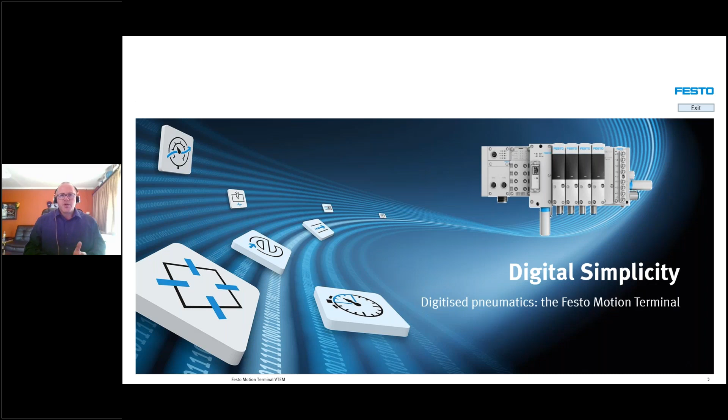So where to from here? First, the Motion Terminal, which we refer to as VTEM, is opening up radical new dimensions in the world of automation, as it's the first valve in the world to be controlled by apps. So it's the first product to truly earn the label of digital pneumatics for a wide range of functions that currently require over 50 components. So once again, digital simplicity.

What does that really mean? Digital simplicity means maximum flexibility combined with maximum standardization with minimum installation. So for the first time ever, the function of a valve can be changed by an app. What does that mean? It means new intelligent technology consisting of pneumatics, electronics, software, and hardware is there to realize directional control valve functions right through to complex motion tasks.

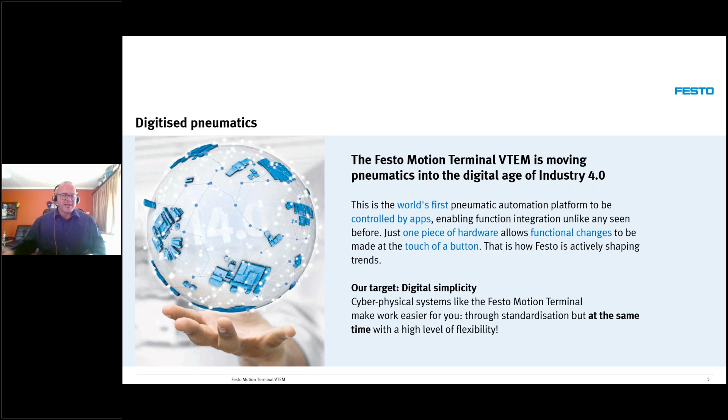It also allows us to realize functions such as status monitoring, reduced energy consumption with far fewer parts than before. In addition, some motion apps can automatically adjust to changes in parameters. We know in standard pneumatics, if you have changes in atmospheric pressure, temperature, or compressor load, your pneumatics react differently. That's why we say the VTEM is a true Industry 4.0 leader in digital pneumatics. We mentioned combining mechanics, electronics, and software, and this is all brought on by the requirement of Industry 4.0.

So Industry 4.0 represents another fundamental change in the world of production, where the real world and the virtual worlds are growing ever closer, driven by the internet. So modern information and communication technologies are being fused with traditional industrial processes in what we call cyber-physical systems, thereby changing the value creation chain in many production areas.

This global change, and yes, it's a global change, not just in South Africa, is taking place on all levels of the factory of the future. So digitalization will profoundly alter the world of production. A standard solution that combines mechanics, electronics, and software can become a cyber-physical system, with conventional objects turning into subsystems that have the ability to not only receive data, but communicate data.

So all of that being said, where's the benefit for you as the customer realizing Industry 4.0? And of course, that's realizing the value-added benefits. So with the onset of Industry 4.0 or digital pneumatics, we can now include things like analytics, condition monitoring, and of course, all of this brought to you by cloud-based services. So by the likes of a dashboard, you'll be able to see the health of your machine. And this introduces what pneumatics couldn't really do in the past: preventative maintenance.

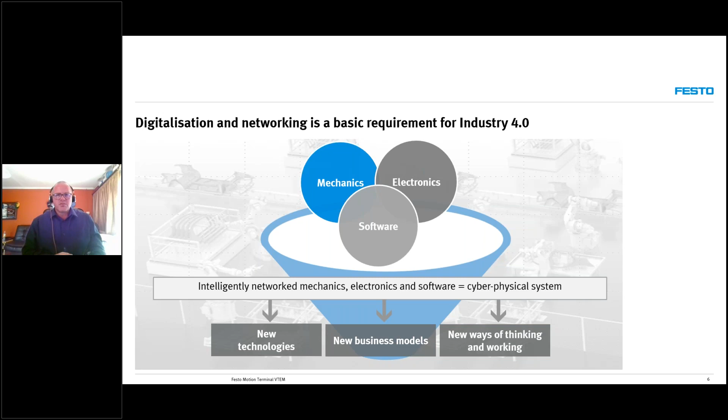So this I refer to as a typical disruptive technology. So you might ask, what is disruptive technology? Disruptive technology is innovation that radically changes the way consumers act, produce, or consume in the industry of today. So we all used to go to work with a GPS, perhaps carrying a notebook, maybe the video camera over the shoulder, your laptop under the arm, the old phone. And that is where we really see disruptive technology took over and changed the way consumers go about their daily lives.

So if you leave your life at home, which we refer to as the phone, you've lost all of those components. So that's a typical application of disruptive technology. If you look 20 years ago, I can remember my fiance at one stage saying, I've got a laptop and I've got a phone, why would I want this thing called a smartphone? That's back when BlackBerry was just coming in. So imagine where she is today, a Samsung freak, where everything is now in one form of technology.

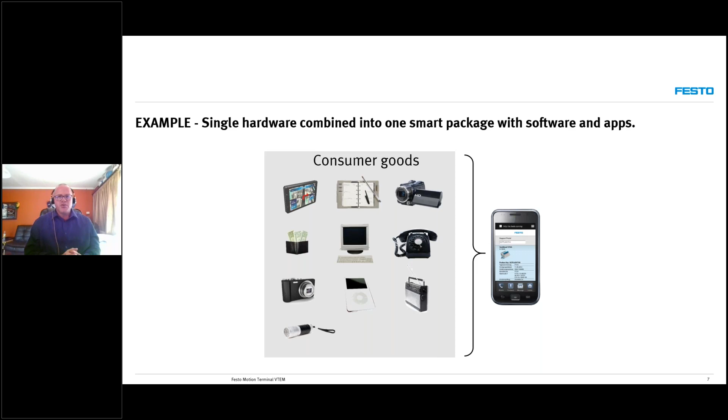So you might ask, how do I draw this conclusion into industrial process automation? Well, it's quite simple. We have a look at the valve terminal. I'm going to put on my laser pointer. So if we have a look at the valve on the right hand side, we start to see that one singular valve can replace up to 50 components. And those 50 components could be perhaps shock absorbers, proportional pressure regulators, getting rid of those nasty little flow controls that people love to adjust all hours of the night. So all of those are now being combined into a single valve.

So once again, what is the benefit for you as a customer? It's reduced components that you need to keep in stock. It's flexibility that you've never had before. That valve has the ability to camouflage itself or change its characteristics by selecting an app. My colleague Brett's going to show you a little bit later how you exactly change between apps. But imagine having one valve that can cover all of that, whether you've got a 5/2 way, a 5/3 center closed, 5/3 center open, or a 3/2, all of those in one.

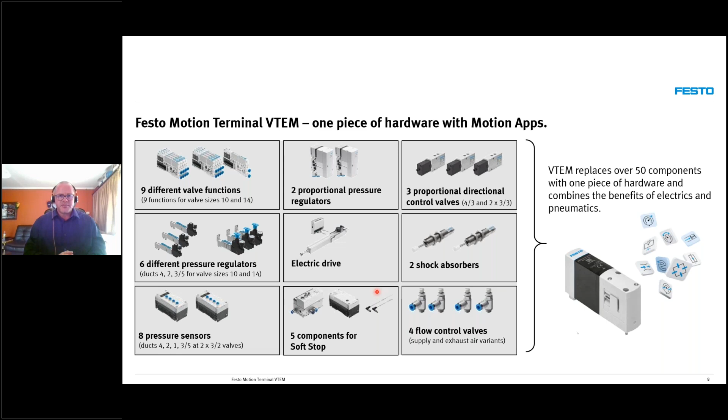Over and above that, you can now include other things like proportional pressure, proportional flow, all of it through one valve. So let that sink in. One valve that will replace pretty much any valve that you've got in your factory. Sounds too good to be true. Well, let's have a look at how it actually does work. So on the left-hand side, I've got the motion terminal, one cylinder, one valve, and of course an app. Now the app, as Brett will show you, you can select either via PLC or bus to change the characteristic or the method that the valve is actually operating.

So let's compare that to standard pneumatics. On the right-hand side, still the same pneumatic cylinder. We have flow controls, pressure control, because we want to be able to do some form of energy saving or energy monitoring. So we'll have pressure regulators and a standard 5/3 valve. For those of you like me that have forgotten what these hieroglyphics or symbols look like, let's relate it to your machines out there. So let's start by introducing the valve that you might see on the machine: a standard 5/3 bistable valve. So what do we do on machines nowadays?

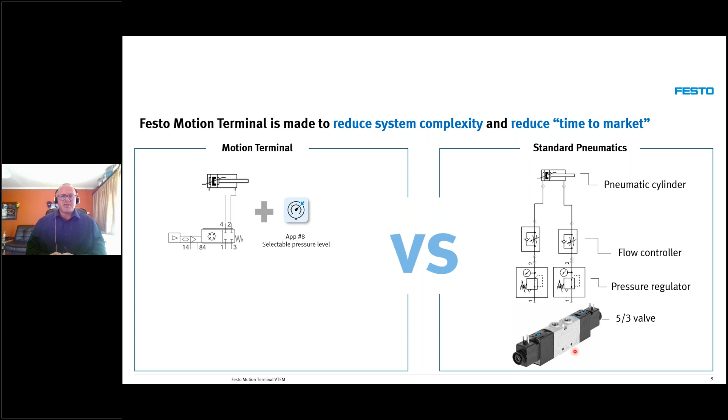We need to control the speed of the cylinder, so we'll include flow controls. Remember, on these at the top, you'll have a little knob. You turn the knob, and of course, you're controlling the exhaust pressure from the cylinder. That will in turn slow down the cylinder, and with that, reduce banging, the mechanical wear and tear on a cylinder. So flow or pressure control: we add in two pressure controllers, and now we can control the pressure going forward and the pressure going back.

You might ask me why? Because let's have a look at an application where we want to move a box. Let's say in a food and bev industry where you're moving a whole bunch of products into a box and then bring an empty plate back. You don't need the same pressure moving backwards as you do moving forward. So believe it or not, you can save up to about 70% of your energy consumption by being able to vary your pressures for your in-stroke and your out-stroke.

But having two pressure controllers that are manually adjusted and locked is not really a digital way, or an optimized way, of controlling a system. So let's have a look at changing those to an electrical control philosophy. Of course, with proportional pressure regulators, we can control those via analog, so perhaps 0 to 10 or 4 to 20, or even IO-Link. So now we can digitally, by means of a recipe, change the pressure.

And if you include new electric flow controllers, you can now, by means of recipe, change all of those parameters to suit the machine. But have a look at that. That's 5 components that you need to look at: a valve, 2 pressure regulators, 2 flow controls, just to supply one valve. So let's compare what the VTEM actually can do. You've got one component instead of 5. You've got one BOM, one bill of material that you need to size up or order.

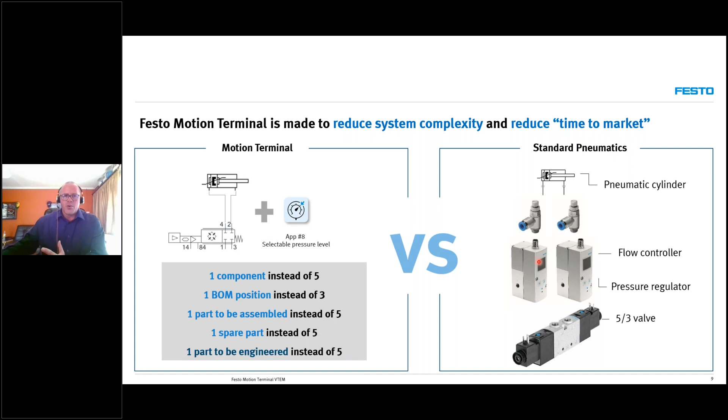You've got one part that needs to be assembled, that needs to be maintained, that needs to be fault found on. So you've got one spare part instead of 5. Look at what benefit that's got for your storeroom. Now your storeman only has to have one spare part instead of 5 different spare parts or 3 different categories. So that's where the VTEM really plays its part. Hopefully you can see that we've managed to reduce the parts. We've given you flexibility, and all of this in one simple valve terminal. When I say simple, remember digital simplicity.

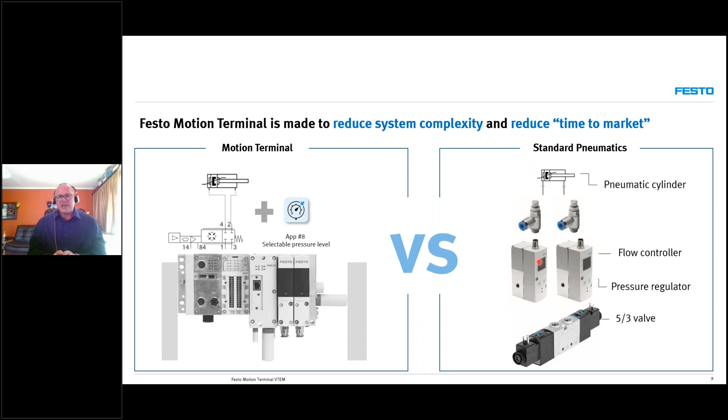So let's compare electric automation with standard pneumatics. As you might know already, Festo has a full range of standard pneumatics, a full range of premium electric automation products, and of course, we're including VTEM as the bridge between our customers in two worlds, where some of them are so engrossed in the electric automation side that they've converted the majority of their machines to high-speed servos, looking at greater precision, perhaps complex movements or variable positioning profiles. So that's all the benefits you get from a traditional servo system.

Comparing it to standard pneumatics, it's a bit easier to operate. Perhaps the overload protection is of interest to you, or maybe because it's been in the industry for so many years, you deem it to be reliable and of course sturdy. So on the two hands we've got our pneumatic customers and our electric customers, and now we put the VTEM in the middle, where of course we now get digitized pneumatics. The VTEM is now giving us the option of creating complex movements without the need for servo pneumatics.

For those of you that ever had the, I call it misfortune, of having to set up a servo pneumatic system, you need high levels of expertise and programming background to be able to set it up. And even though it was revolutionary in its time, it has seen better days. So looking at the VTEM offering things like higher functionality and condition monitoring, do you see where the gap between standard pneumatics and standard servo technology is now closed and bridged by digital pneumatics?

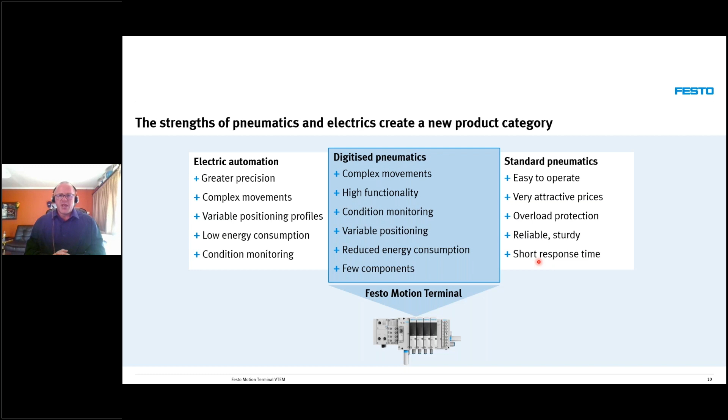One of the key elements, of course, is the reduced energy consumption, but I think one of the biggest parts that stands out is the fewer components. One of the applications that we'll take you through at the end of the webinar shows you how we can reduce big complex panels with proportional pressure regulators into one valve terminal. But I don't want to give too much of that away, because I believe you'll be amazed at what it can do. So how does the VTEM actually work internally?

So without going into too much technical detail, each valve slice has 4 piezo valves internally. So with that, you'll be able to see that on your 2 working ports, output port 2 and output port 4, we have 2 piezo control valves. By adding in flow sensors and pressure sensors internal into the valve, we can control both pressure and flow to both ports simultaneously.

So let's imagine a system where in the old days you wanted to lock a pneumatic cylinder mid-stroke with a 5-3 valve, and you would pressurize both sides of the port. Taking into consideration perhaps the wear of a seal on the cylinder, you'd always get creep to one side or the other. So with the onset of VTEM, or with the support of the flow controllers, we can actually monitor if there's movement in that cylinder and compensate by changing the characteristics of the valve to force the cylinder back or to lock it in position.

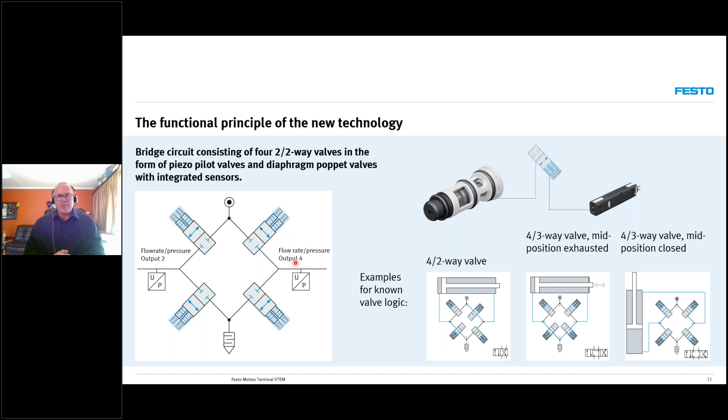So that is in essence what the VTEM does internally. So it's combined your flow controls, your pressure control, the valve function, all of it in one platform. So where does this fit into your machine? Do you need just the VTEM? Do you need high-level PLC?

Well, staying with Festo's ability to integrate into third-party networks and PLCs, the VTEM also seamlessly integrates into many field buses and of course the PLCs out there. So if it's Siemens, Allen Bradley, or perhaps Omron, we take care of the EtherCAT technology, Ethernet IP, Profibus, and Profinet. So you might ask, do you then require an additional PLC on the machine?

So for smaller machines or standalone machines, you do have the option of including an onboard PLC based on the Codesys platform, and you can of course include it into the valve terminal and have additional IO, etc. So really flexible solutions depending on what applications.

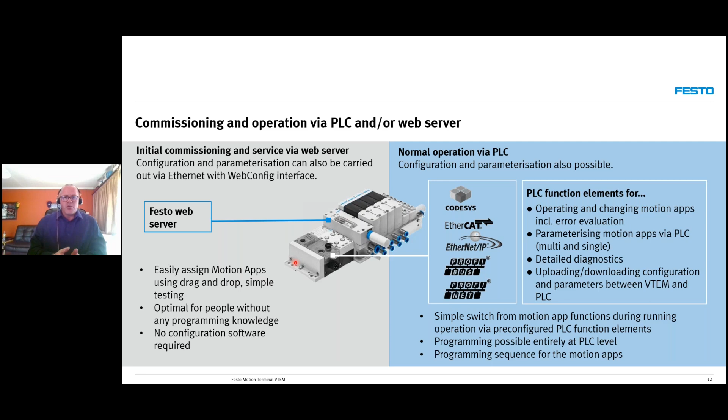So one of the things that has always been asked is, is the VTEM designed for your rocket science type applications? And it's not. If we look at the majority of the applications, you'll be quite surprised in the basic applications that you can do, reducing complexity, reducing installation requirements, all from one single valve terminal.

So if we look at the layout or the topology of what the VTEM actually looks like, on the left-hand side, you'll see where the CPX bus node module sits. So of course, there you can add your communication module, or depending on the amount of IO you need to control on the machine, you can have a Codesys controller inserted there. On the CPX module, you can add in additional IO for the process logic, but on the right-hand side of the valve terminal itself is where the integrated IO is for the VTEM technology.

So because of the speed that the VTEM needs to change parameters and adjust itself, the IO is directly connected into the VTEM module itself, and therefore we've reduced bus delays, scan delays, all of that to ensure the fastest and most economical adjustments from your valve terminal.

So as you'll see at that point in time, we've got a sample of the 4 slice. So even though this is only 4 valves, each valve can be either 2 proportional pressure regulators, it can be 2 3-way valves, it can be 5-3, it can be a lot. So one of the applications, you'll see how we can reduce your installation. So standard configurations, we have an 8-valve slice, the 4-valve slice, and the latest to be introduced is the 2-valve slice.

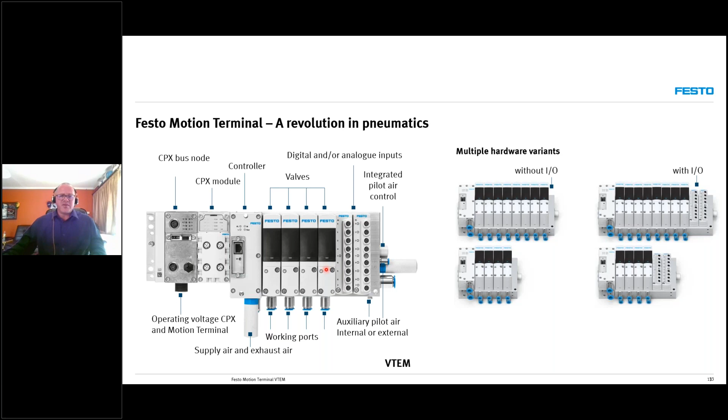So one of the other questions that I've always gotten is, do you have to have only VTEM valves if you've got basic applications like a flap where you just want to have it open and closed and you don't really care if it's controlled, you just want a basic valve? So with this, you can of course integrate standard valves into the platform. It doesn't have to all be that.

So earlier I mentioned that the VTEM is controlled by apps. So how does that work?

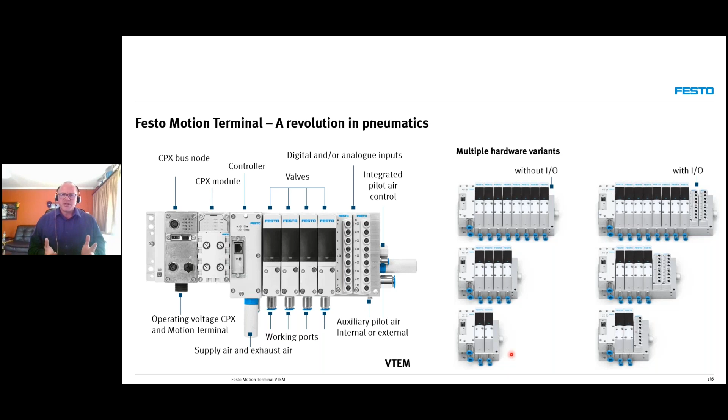So if we look at our licensing department, and I say licensing department with a bit of tongue in cheek because it's not like the South African licensing department that never works. This one actually does.

So the way it works is you've got access to your online shop. You then add in the Festo App World as a selection, then you purchase a license or an app. So with the valve terminal, there are several apps that come standard, and Brett is going to touch base on how these apps actually work or change between the valves. But what I'd like to bring across today is once you buy the app for the valve, whether it's a motion app or a pressure app, it stays on your actual valve terminal.

So let's say in about 10 years time, you need to replace the complete unit for whatever reason. Let's say a forklift driver misjudged and he crashes into it. Your license can be uploaded, stored in our licensing department or our license central, and be downloaded to your new valve terminal. So it doesn't mean you have to reinvest in those licenses.

So for each valve terminal, you will buy a license or an app, and that will of course be able to control. So a lot of the guys were concerned that they couldn't just take off the license, for instance, like old Windows, they can now put it onto a newer VTEM.

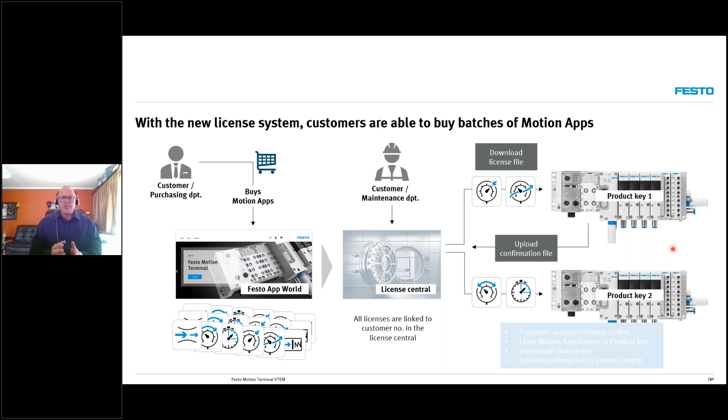So earlier I mentioned that it's not just for rocket science applications, it's for basic applications where you need better control, perhaps reduced complexity, or just better feedback from your standard pneumatics. So if we look at applications out there today, we look at pressure control, perhaps motion control, a combination of them all, or just standard flow.

So in our applications today, we're going to have a look at proportional pressure control, where the valve terminal can actually go from vacuum directly into pressure. We can do blow functioning, we can do air knives, but we'll be looking at a curing press in the tire industry today, as well as synchronized movements. So all of these from pneumatics, which traditionally was, let me say, difficult to achieve.

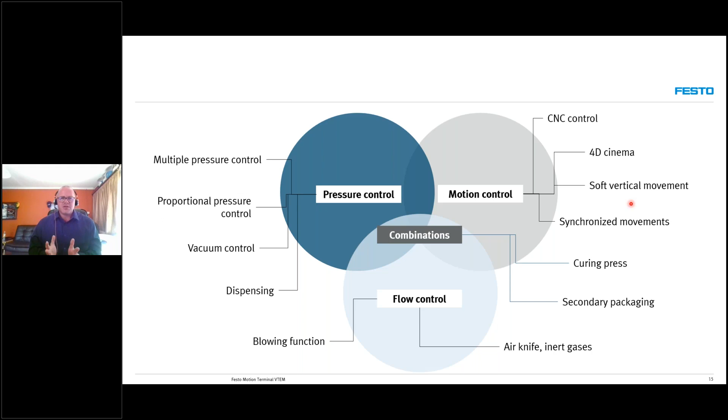So with that, I think I've said enough. So before we go into the application examples, I'm going to introduce you to my colleague Brett. He was, how can I say, kind enough to do us a demonstration. So the demonstration is a recording purely to ensure that we have no buffering issues. So I'm going to start that and of course hand over to Brett for after that. So waiting for video. There we go.

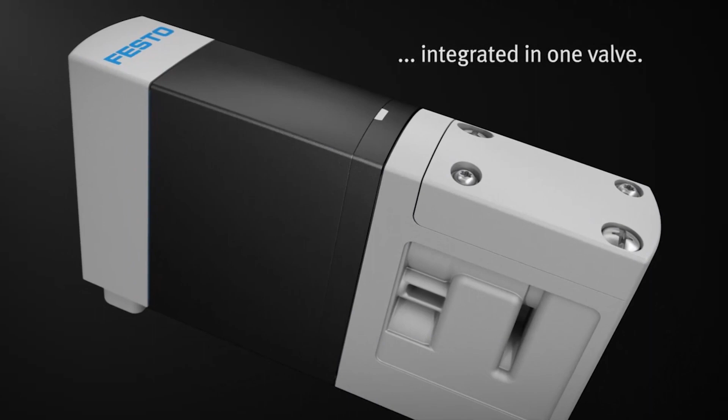Good day. My name is Brett Benakada, and today I will be taking you through an overview and quick demonstration of our VTEM or Motion Terminal demo case. We have a few of these around the country, so please feel free to contact your nearest sales engineer or application engineer for a face-to-face demonstration. So let's get the VTEM demo case set up and we're ready to go.

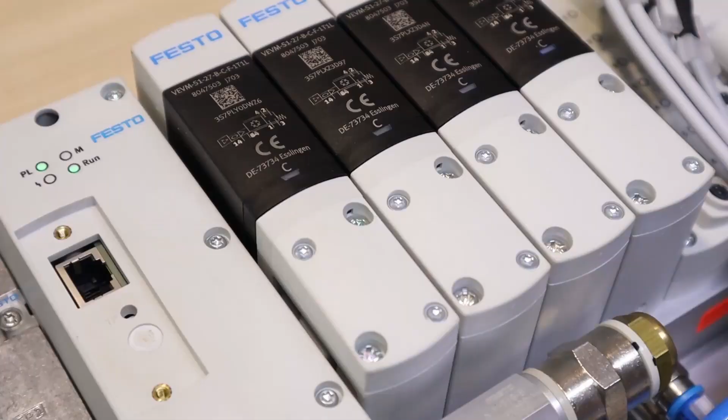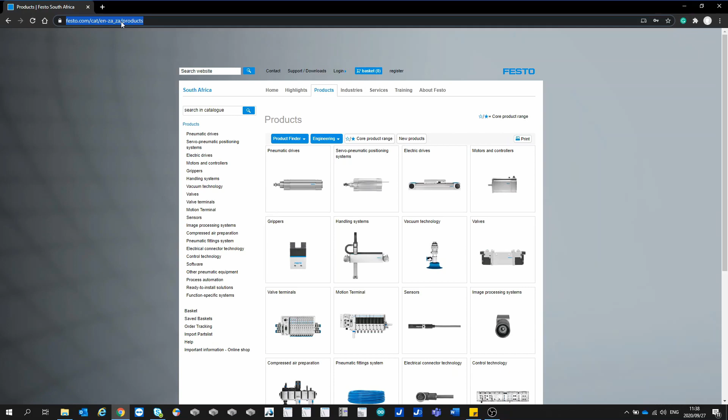To configure the VTEM, you don't need any special software. It has a simple web interface which you can access using your computer's browser through an Ethernet cable. So we will type in the VTEM IP address in the browser. And here we are presented with the actual configuration as a picture view of our VTEM. So let's click on the configuration tab, click accept. We have to log in to make any configuration changes to the VTEM.

Here we can see these two valves here have apps assigned to them by these little icons over here. This valve is currently not in use or doesn't have an app assigned to it. And this valve here also has an app assigned to it. We can also have a look at the status of the inputs, and we can see the pressures of the exhaust port and the pressure port.

We can also see the available apps that we have on this Motion Terminal. Here are all the apps that are currently available. Here's how many licenses are loaded onto this specific Motion Terminal, and here's how many are actually available for use. Some apps are available across the board, so when you purchase the app, it is available to all the valves simultaneously. Some apps are per valve.

So if you have one app available or one app loaded to the VTEM, that app is only available one at a time. So you can load it to valve number 1 and you can use it there, but while it's used by valve number 1, it cannot be used by valve number 2, 3, or 4. So if you would like that app to be used in more than one valve at the same time, you will need to purchase 2 of those apps.

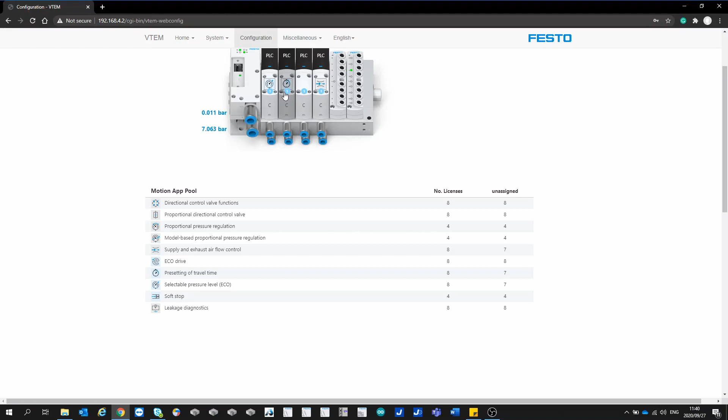Right, so to configure the valve, we click on it, and currently we can see that this valve has got the app assigned selectable pressure level, or the eco app, where you can select the forward pressure and the backward pressure to save air consumption. We are going to unassign this app by taking control. Alright, so this takes control from the higher order PLC. Now we have control of this valve from this web user interface. We're going to unassign this app. Now you can see there's no app assigned.

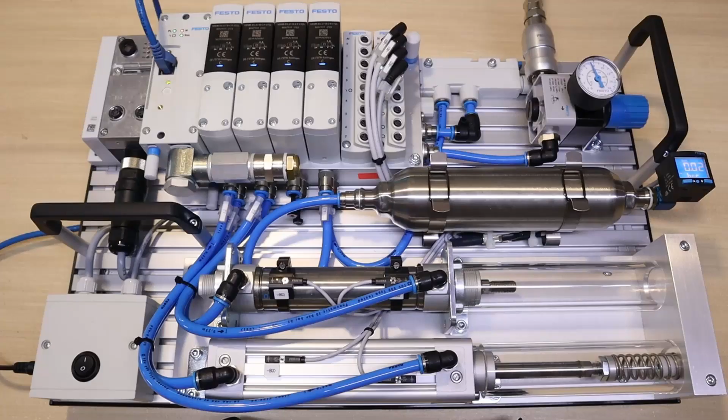So here we can see valve number 1 is connected via these pipes over here, and if we trace them back, they run to this cylinder over here. This cylinder has a spring on it, and the idea of this demo here is to show you how the proportional pressure works. So let's set that up. So let's find the proportional pressure app.

There we go, proportional pressure regulation. We're going to click on that. We're going to assign that app to that valve. Okay. And it asks you for some basic parameters of the application.

Now, the proportional pressure regulation app doesn't require too many parameters other than a rough estimate of the volume that you're controlling. Here you can see it's just a small, medium, large, or customer specific. But basically, anything below 0.1, anything between 0.1 and 1 liter, and anything greater than 1 liter. This cylinder is somewhere between 0.1 and 1, so I have selected the medium volume.

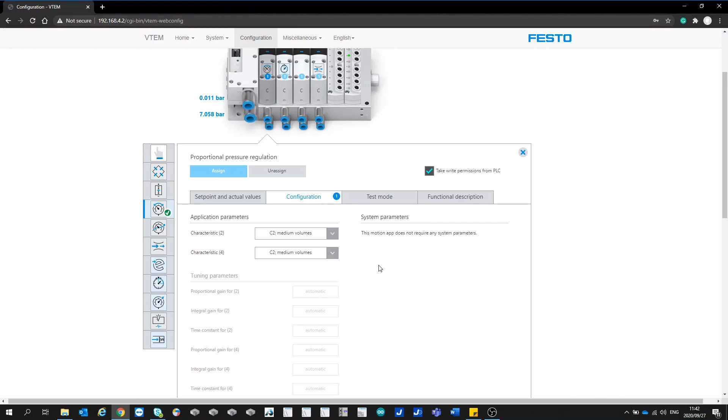Right, now we can start testing. I'm going to start the test run. Right, now the current status is port 2 blocked and port 4 blocked. Port 4 is currently connected to the back of the cylinder. Port 2 is currently connected to the front of the cylinder. So in theory, if we add pressure to the back port, the cylinder is going to move forward.

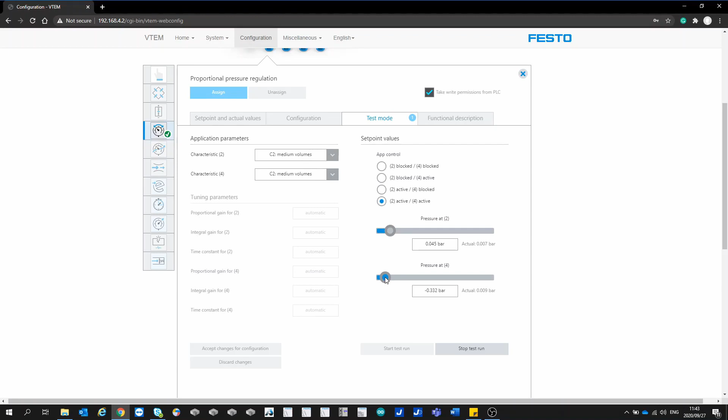Right, so let's make both ports active. Since we can control the pressure on each port simultaneously, we make them both active, and currently we have a set point of -1 bar. Let's just make that 0, roughly 0. And if we then go and add a pressure greater than 0, we can actually see the cylinder starting to compress the spring.

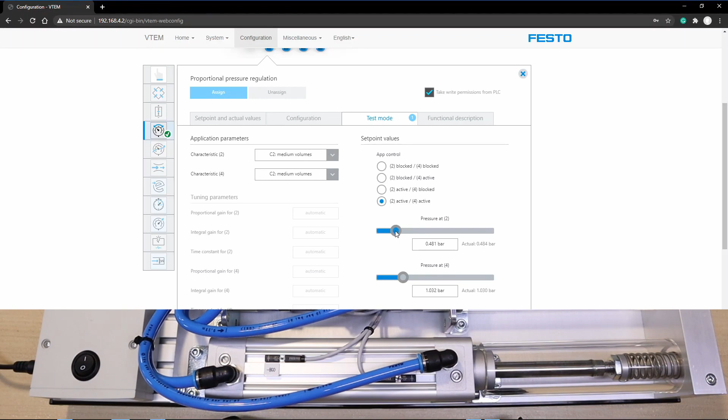And as I slide the slider back and forth, we can see the higher the pressure, the more that spring gets compressed. Okay, so proportional pressure control. Now you can control the cylinder as you would in any application, just forward and backwards movement. Okay, but you can set the forward pressure and the backward pressure. So that's a basic demonstration of how the proportional pressure regulation app works.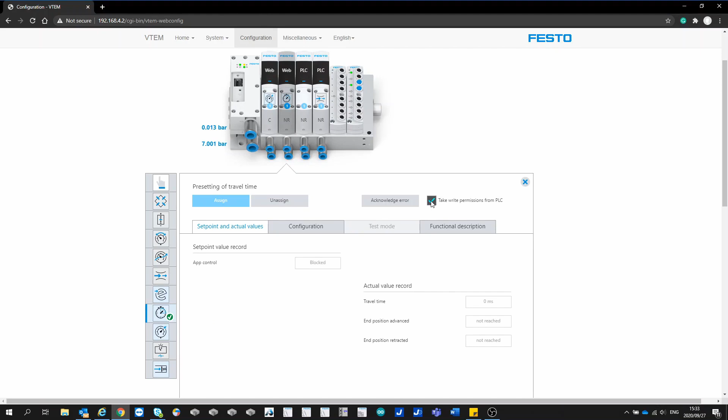Okay, so let's move on to the next valve. The next valve here, number 2, is piped up to port 2 and 4 over here to the second cylinder. It's just an open-ended cylinder with 2 limit switches. We're going to assign the app called presetting of travel time. So let's select valve number 2. Let's select this presetting of travel time. Right, and assign that app to the valve.

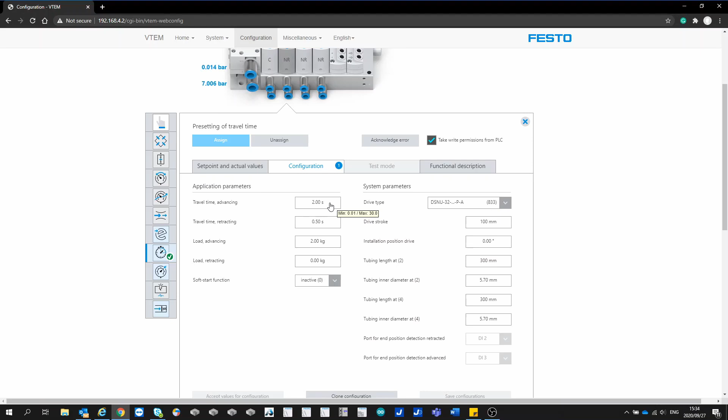And what this app basically does is it asks you for the travel time to get from the retracted stroke of the cylinder to the advanced stroke of the cylinder. And it will then automatically set the throttling of the cylinder to get that exact speed. It does a few cycles, maybe 2 or 3 cycles, and by then it has already calculated the throttling position, and from there onwards it's just making minor adjustments to maintain that speed that you've asked for.

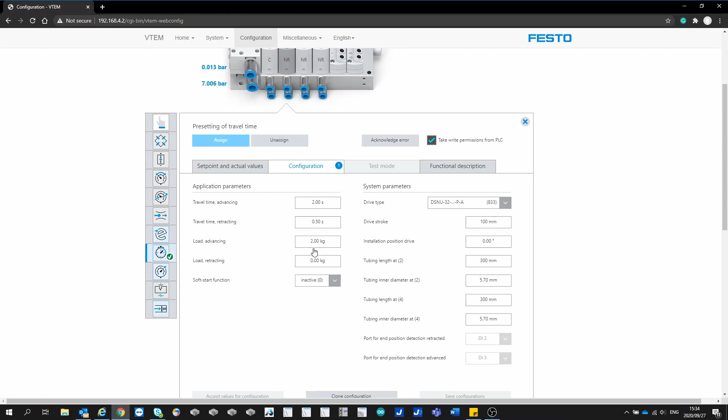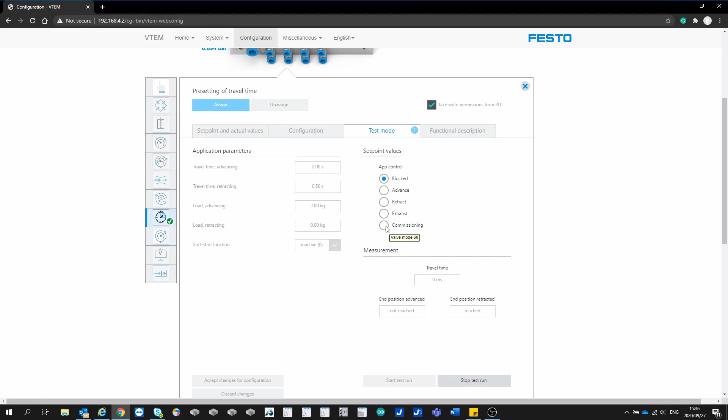So we've put in a value here of 2 seconds for advancing and 0.5 seconds for retracting. Okay, so let's push the start test run button, and we're going to change the app control mode into commissioning, which is basically going to cycle it forwards and backwards until it reaches the desired flow control positions. It's not going to be perfect for the first few cycles, and as soon as it gets into its dialed position, it's going to store that value for you, and then you're ready to run.

So now you can see it's saying tune trajectory. Here you can see what the actual travel times are. Okay, so it's happy now. So if we do some tests, we're going to go advance. So that took 1.8 seconds. Retract. That was pretty much on target. Go back and forward a few times.

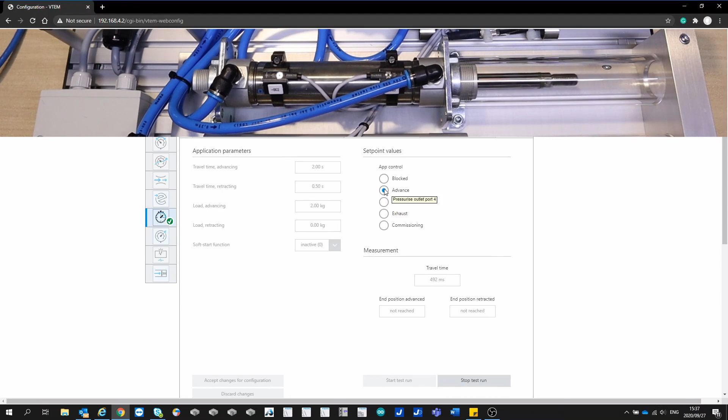The system is continuously compensating for any changes in pressure, changes in temperature. And you can see every time I go back and forward, the forward stroke takes about 2 seconds, and the stroke back takes about half a second. And that's what the presetting of travel time does.

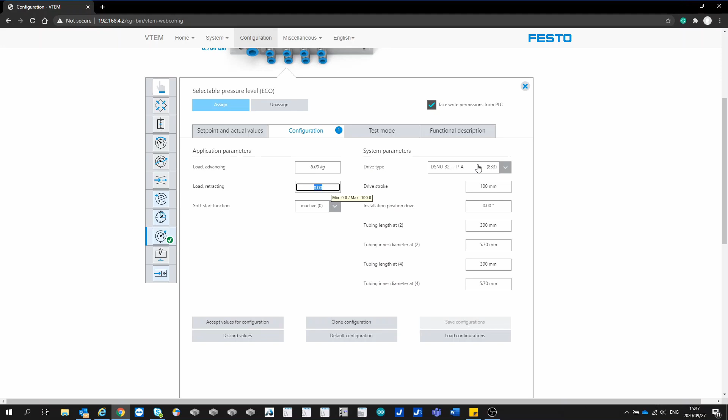I would also like to show you the Selectable pressure level app. This is one of the eco apps to save energy. Let's enter in some parameters here. Right, so this is just asking you for the size of the cylinder, some length of tubing and diameters of tubing. We can save a lot of energy by dropping the pressure of our application. We might not require the full force of the cylinder that we are using, but yet we're still running at 6 bar because that's just what the whole machine runs at.

Now, by dropping the pressure on that cylinder, you're not filling the whole chamber of the cylinder with 6 bar of air. For example, you're only filling the chamber with 2 bar of air. That saves a significant amount of air volume. Now, what we're going to see here is when we drop the pressure level, the speed actually won't change. Speed is determined by the flow of air going into the cylinder, not the pressure. The force is regulated by the pressure.

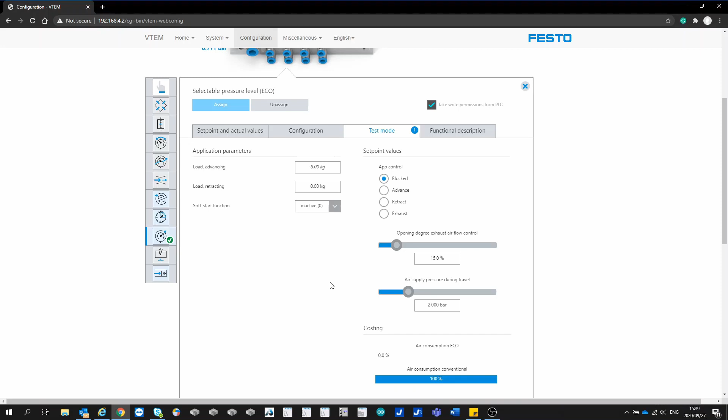So if we advance the cylinder, we've set the air supply pressure during travel to 2 bar. When it reaches its end position, it builds up 2 bar inside the cylinder and then closes the valve. You can see here we've only built up 2 bar of pressure.

And when we move it back, again it builds up 2 bar and stops supplying pressure. This is the speed of the cylinder, so this would basically mimic your flow controls. Let's make this quite fast. If we go advance and retract, you can see that is quite fast.

And if we had to drop it down to 1 bar, you can see how the cylinder hasn't actually slowed down. And we can go right up to 4 bar, and the cycle time of the cylinder doesn't actually change.

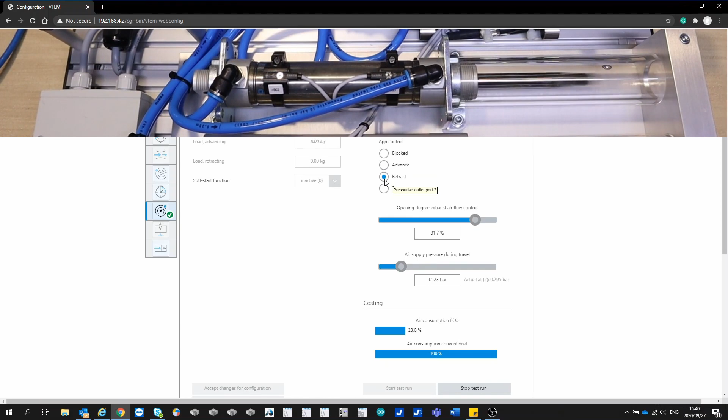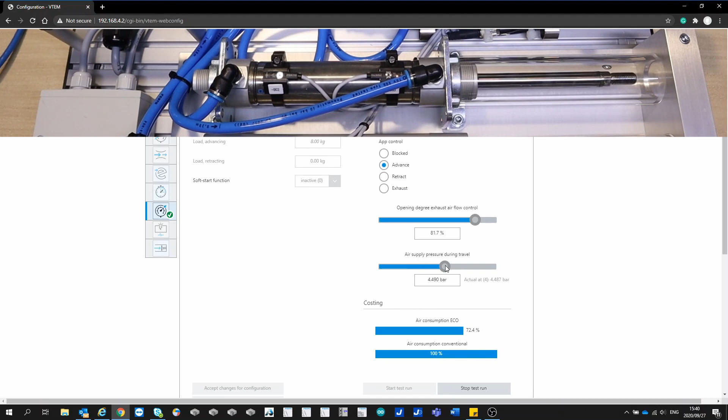But what we can see running at 1.5 bar, we are using 33% of the energy we would if we were running at 6 bar. And if I up the pressure to say 4.5 bar and do this, I'm now using 72% of the energy if I was running at 6 bar. So just by dropping the pressure from 4.5 down to 1.5, I'm saving a lot more energy, but I'm still getting the same cycle time.

Now, this is only applicable if you don't require the force from the cylinder, but in most circumstances we're only using the force of the cylinder in one direction. And there are other apps that allow us to set the force going forward and set the force going back, where we can save an insane amount of energy.

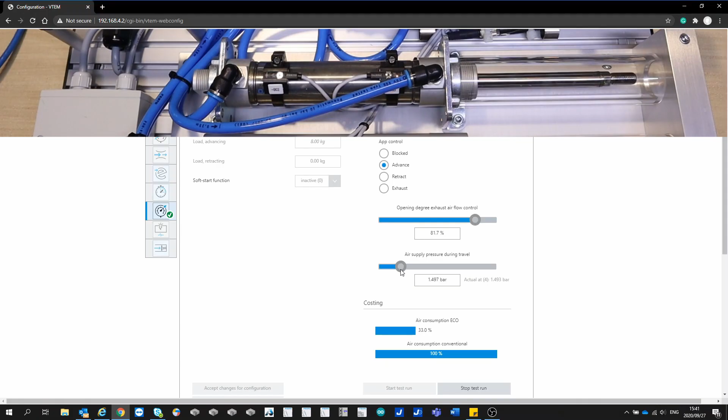Awesome, thanks, Brett.

Thanks, Marcus. I'm sure you guys will have noticed that there wasn't massive programming that Brett had to do. Brett, correct me if I'm wrong, that's all just via the web interface, selecting a couple of parameters, making life a lot easier for the guys.

Yes, exactly. Very simple user interface, and also very easy to change between apps. And obviously, if the valve terminal is connected to a higher order PLC, you can change between apps on the fly. So they don't have to physically log on every time.

So let's say between a recipe, they wanted to change force to speed. It's a matter of just a signal from the PLC. Yeah, you can actually change the apps per cycle.

They pretty much change in real time. So you could change force control moving forward of the stroke, and then back of the stroke, you could move to flow control. So you can pretty much change the apps at any point in time in real time.

Awesome. But that's enough from my side. I think let's take us through your application that you're busy with there, and then I'll be back later on. Thanks, Brett. Thanks, Marcus.

Okay, so these are 2 local applications that I have worked with recently with the VTEM. And I've chosen them specifically because, as Marcus mentioned earlier, the VTEM isn't for your space age applications or very high-end applications only. They actually solve very, very simple problems as well with major benefits.

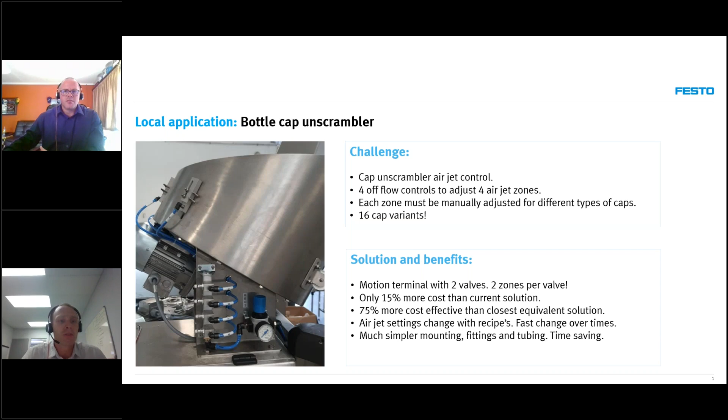So this application here was at one of my customers that build machines or packaging machines. And this part of the machine is actually the bottle cap unscrambler. So as we can see in the picture here, put my laser on, we can see the cap unscrambler bowl.

And these cap unscrambler bowls have a series of air jets. These air jets assist inside the bowl in actually turning the caps over or rejecting the unwanted caps. And the air jets are set according to the type of cap.

Now, this machine had 16 different cap variants. And depending on the caps that we're running in this unscrambler, you had to go and adjust these 4 individual flow controls. Now, the changeover time between each type of cap or each variant was quite long due to the fact that setting these flow controls was a bit of a trial and error process.

Now, with the VTEM, we replaced this bank of flow controls and this pressure regulator here. So the solution was the VTEM, and the benefits were basically as follows.

So as Marcus mentioned earlier, the VTEM could have 2 pressure zones per valve, which means for this application, we actually only needed 2 valves. So that gave us 4 pressure zones.

The VTEM application was only 15% more cost than this current solution, and 75% more cost effective than the closest equivalent solution. We had actually looked at digitizing this process a while back, but with the solutions available then, it was just too expensive. 75% more cost on this was just not feasible.

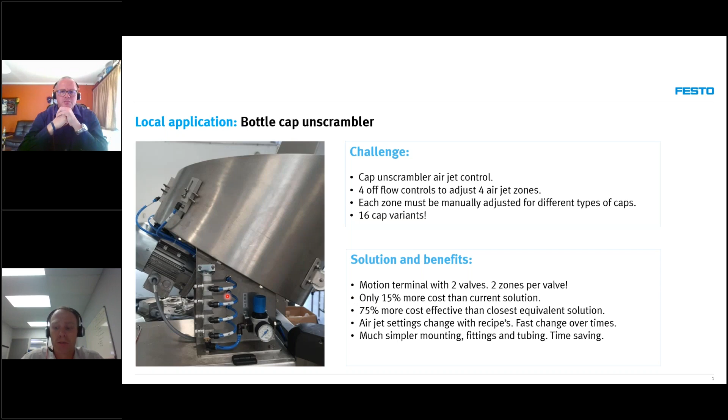The second application was for a multiple pressure zone, in this case 12 different pressure zones for a spray nozzle on the end of a robot. These spray nozzles require quite precise pressure control. The pressure controls the force of the paint and also the shape - these jets control how the shape of the fan of the paint comes out of the nozzle, and depending on the recipe and what it was spraying, these shapes had to change. So a few years back when VTEM wasn't available, this was the solution that was provided.

We had 12 of our VPPM proportional pressure regulators, all controlled via IO-Link. As you can see, it's quite a large enclosure. We needed quite a large PLC with all the IO-Link masters on them, and there was a lot of fittings, piping and wiring.

This was recently changed out by a VTEM. We only needed a VTEM with 6 valves, because again, 2 zones per valve, which gave us 12 independent pressure control channels. It was 60% more cost effective than the current solution. The pressure control, because of the way the VTEM controls pressure using its piezoelectric technology, was better, giving a better quality paint finish on the end product. It was much simpler mounting, fittings and tubing - again, big time saving. The panel was 75% smaller - again, space saved and time saved. This whole panel here was simply replaced by a VTEM in this row, and basically everything below here was completely negated.

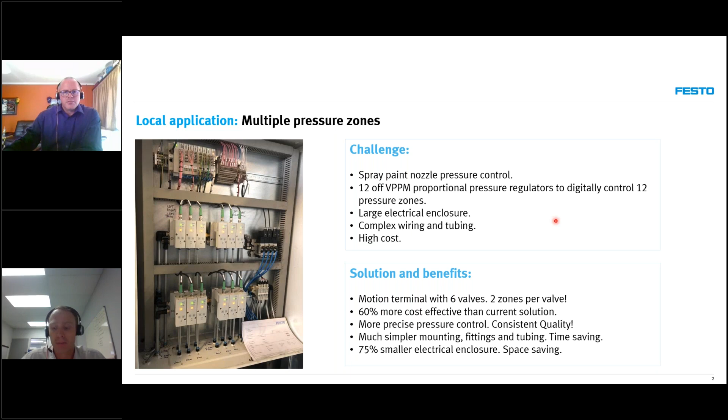So those are the 2 local applications I've done. Again guys, this VTEM can solve really, really simple applications. Don't think of it as only for really high end, high speed, or only for its Industry 4.0 features. Together with those 2 simple applications, the machine gained a whole bunch of benefits like leak detection, energy saving, etc. Those are just benefits that come with the VTEM.

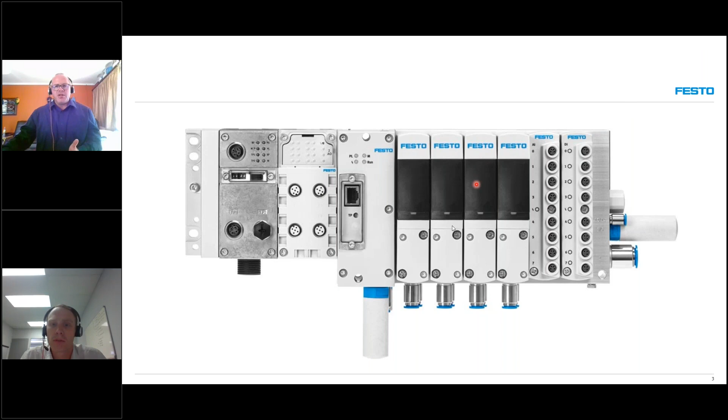Thanks Brett. Yeah, it's amazing to see how being able to adjust between a recipe and manual adjustment just speeds up the machine, and therefore it really makes the life of the OEM or the customer a lot better. Hopefully you'll be able to see my screen again, and we're going to have a look at some of the applications that Brett has started to introduce.

So we kick off just as a reconfirmation of what we did with that system - that whole panel, a lot smaller, installed with VTEM.

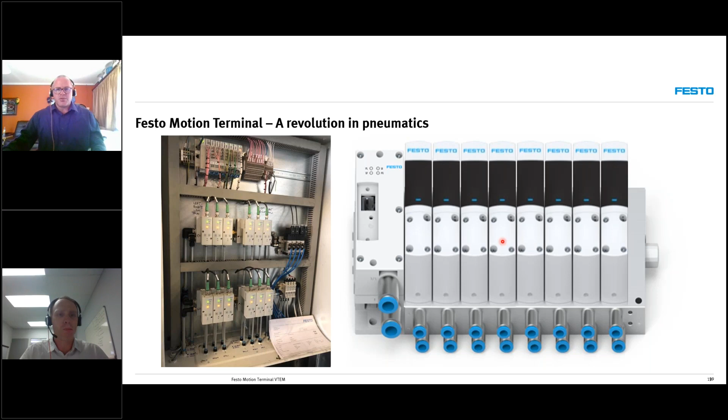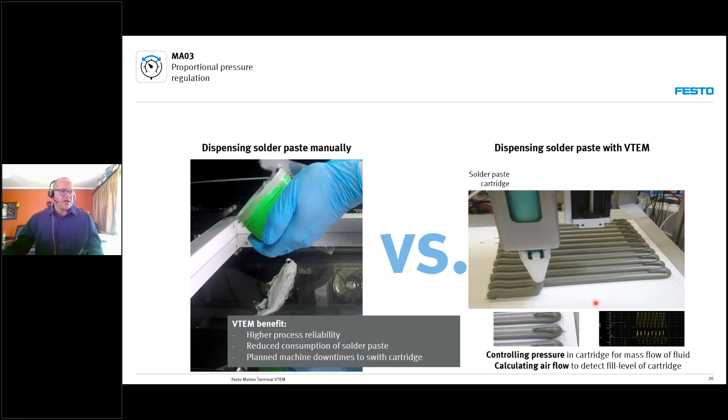So the next application we're going to look at is one a bit closer to home, one that we've done in the tire industry. I've got a video to play to show you guys the benefit - I believe it's easier to believe a video than me just talking to you. So let this video play.

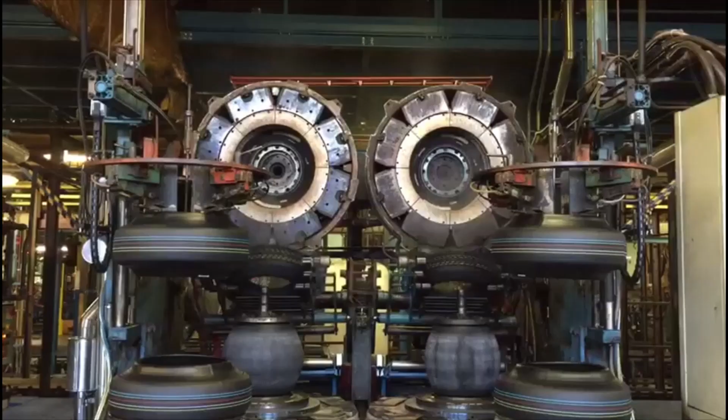Notice that both of the machines are given a signal at the same time, but on the right hand side, that arm took quite some time to get into place. So the interlock of course has delays, plus with the mechanical jerking on the system, that creates mechanical wear and what they call shock on the system - like hydraulic hammer or pneumatic hammering. So you'll see the cycle time is quite long because they have to wait for both axes to get into position. The vibration has to stop, and only then can the rest of the process take on.

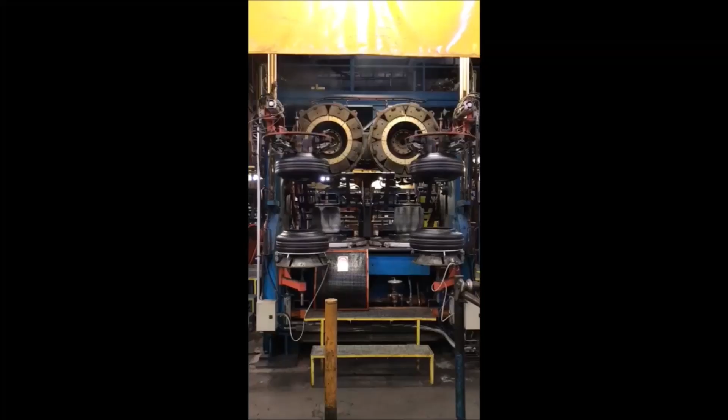So after we put in VTEM, it of course improves. Now try and have a look at the process - you'll see that both systems went in simultaneously, equally. Process started a lot faster, a lot less vibration, and all of that gave the customer an overall energy saving.

As soon as that video is finished, you'll be able to see that both of those axes, it looks like they're being controlled by servos - they're that accurate. So as you see coming up, nice and controlled speed, no vibration on that system whatsoever.

Awesome. So if I go back to the presentation, you'll see that the customers saved around about 60% in energy. And as you know, energy consumption for pneumatic is one of the most expensive mediums that we have for motion at this point in time. And of course, 33% cycle speeding or cycle improvement over a production day can equate to quite a massive saving for a customer.

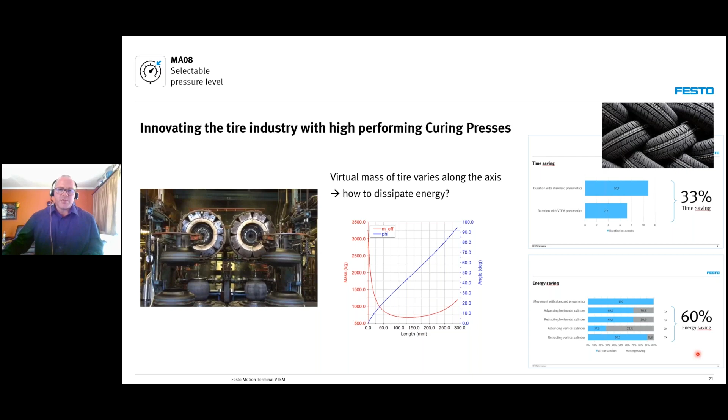So if we look at an application like synchronization - who of you have ever tried to synchronize two cylinders? In the old days, they would cut the pipe in the same length and make sure they're the same distance from the cylinder and put it on the same valve. Then you pray that both cylinders have the same wear and tear on the actual seals, because that is what's going to cripple that synchronization.

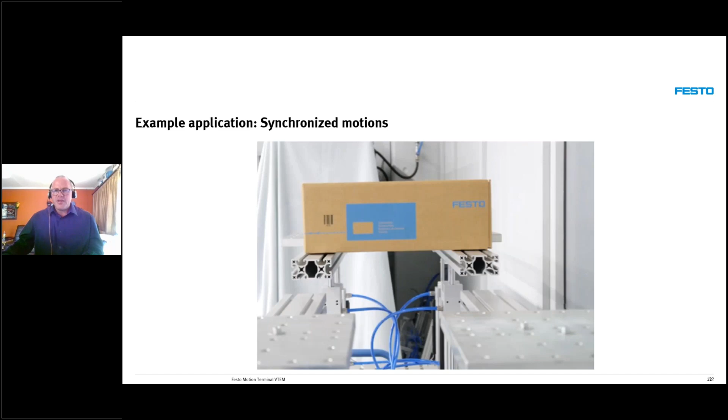So even on slow speed, I'm going to show you how to synchronize. All of these screens popping up, gets confusing on a Friday morning.

So trying to synchronize a pneumatic system on slow speed, you normally get introduced to what they refer to as stick slip, where of course those cylinders start bouncing around. And with the VTEM being able to control the flow and pressure on both ports to high accuracies, you can now synchronize pneumatic cylinders, negating the need for perhaps a stepper or a servo solution.

That's not necessarily just for slow applications - it's also for fast. So same application, just by changing the parameters like you saw Brett did, we've been able to change the cycle time of those cylinders, still staying synchronous.

Awesome. So the last one that I'll be looking at - I don't have a video to play, unfortunately, because we're limited by GoToWebinar - is applications where you perhaps have heavy loads, where you don't necessarily want to go into the cushioning of the cylinder because that would slow down cycle time.

So by introducing perhaps an analog position sensor, you can have heavy loads moved up and down on a cylinder, but because of the control between port 4 and port 2 being so precise, we can lock that cylinder in position without going into end caps and cushioning.

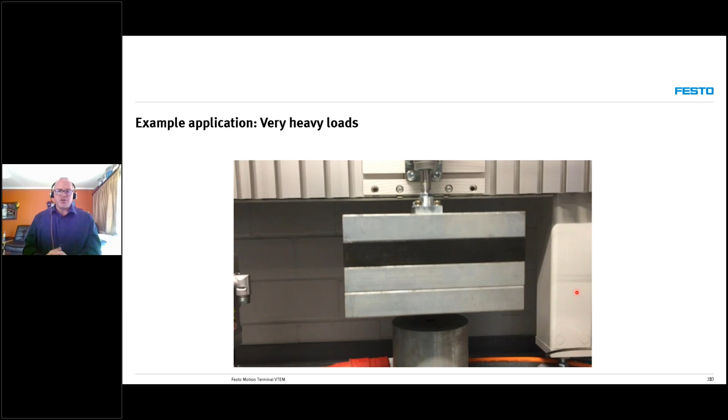So ladies and gents, from my side, that's the VTEM in a nutshell. I'm going to open the floor now to Q&A - a couple of questions, or if you've perhaps got some order numbers, I prefer those. If not, remember, we're more than welcome for you to give us a shout. We will then send an application engineer alongside a sales engineer to come visit you, have a look at your application, perhaps bring one of the demo units and show you in person that it's no magic, no trickery, it's legit digital pneumatics. And like I said, Industry 4.0 revolutionized with this type of control.